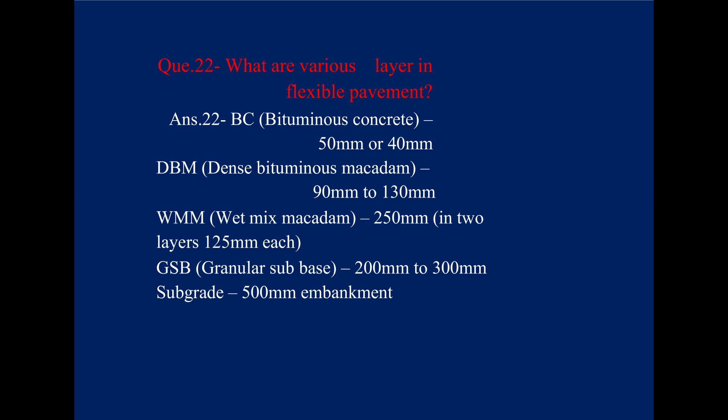Answer: BC, bituminous concrete, 50 mm or 40 mm. DBM, dense bituminous macadam, 90 mm to 130 mm. WMM, wet mix macadam, 250 mm in 2 layers of 125 mm each. GSB, granular subbase, 200 mm to 300 mm. Subgrade 500 mm embankment. Question: what is the method of design of flexible pavement?

Answer: flexible pavement is designed as per IRC 37. Design is based on traffic in MSA and CBR value of soil. Question: what is the method of designing rigid pavement? Answer: rigid pavements are designed as per IRC 58 as plain jointed rigid pavements for highways.

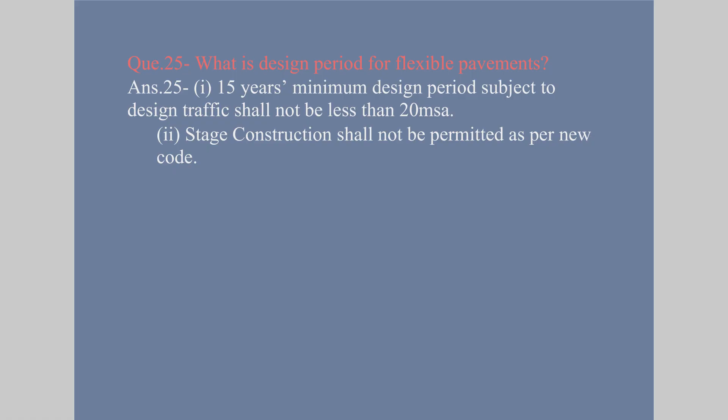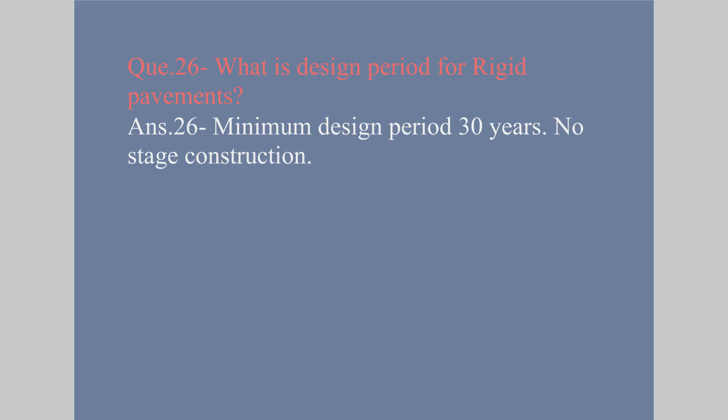Question: what is the design period for flexible pavements? Answer: 1. 15 years minimum design period, subject to design traffic not less than 20 MSA. 2. Stage construction shall not be permitted as per new code. Question: what is the design period for rigid pavements? Answer: minimum design period 30 years. No stage construction. Question: what is the permissible roughness value?

Answer: rigid pavement 2000 mm per kilometer for each lane. Flexible pavement 1800 mm per kilometer for each lane. Roughness is measured twice a year. Question: how do you determine the thickness of overlay? Answer: the thickness of bituminous overlay is determined on the basis of FWD, falling weight deflectometer, test as per IRC 115/2014. Minimum thickness is 50 mm BC, after attending the requirement of profile correction.

Question: what are EPC contracts? Answer: EPC stands for Engineering Procurement Construction. In these contracts, the payments are made by the authority as per work done by the contractor in accordance with schedules. Question: what do you understand, very briefly, by contracts on HAM mode?

Answer: HAM stands for Hybrid Annuity Mode. In these contracts, 40% payment is made to the concessionaire during construction in 5 installments of 8% each, based on progress stipulated. Balance 60% payment shall be made in 15 years in 30 installments, semi-annuities, as prescribed in CA. Concessionaire shall maintain the highway for 15 years of concession period.

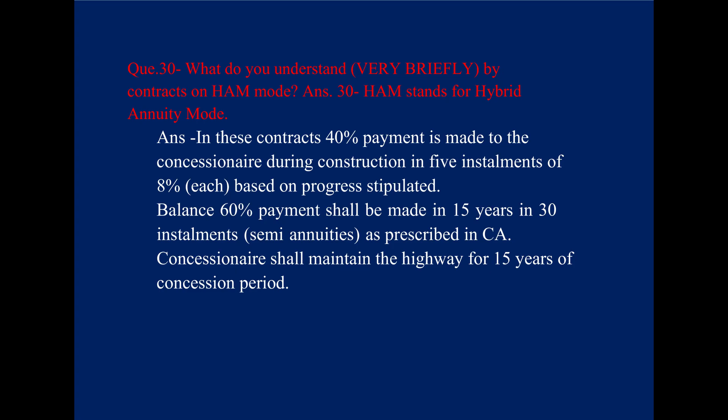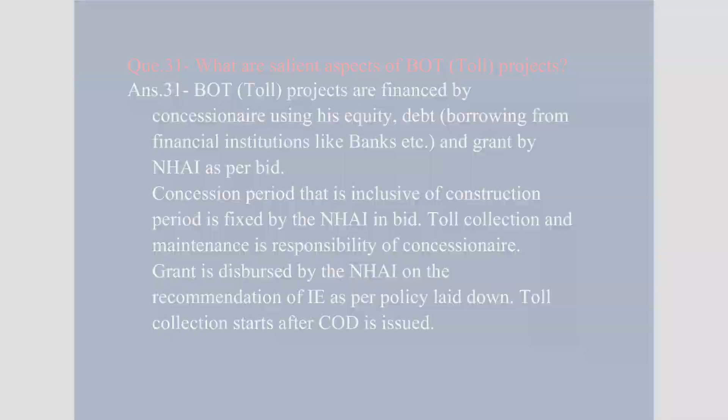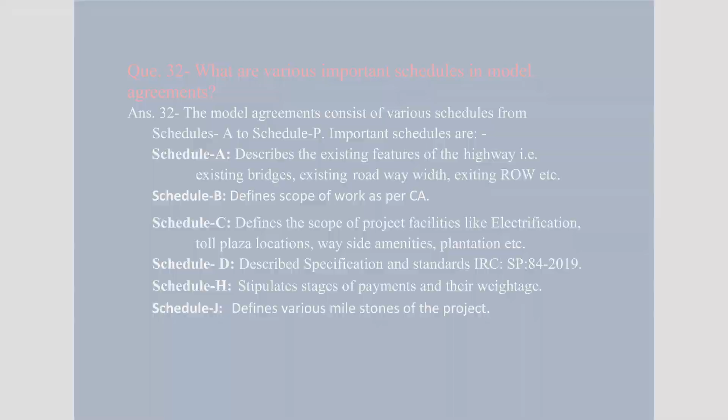Schedule D describes specifications and standards, IRC SP 84/2019. Schedule H stipulates stages of payments and their weightage. Schedule J defines various milestones of the project. Question: what are the various tests to be performed on soil to ascertain its suitability for road construction?

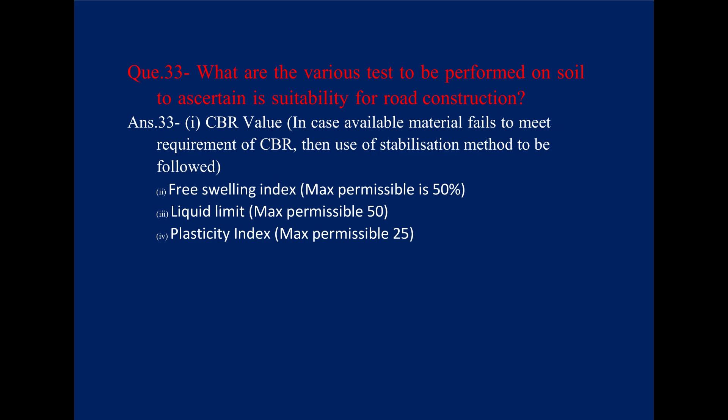Answer: 1. CBR value; in case available material fails to meet the requirement of CBR, then a stabilization method is to be followed. 2. Free swelling index, max permissible 50%. 3. Liquid limit, max permissible 50. 4. Plasticity index, max permissible 25. Question: what are the various things to check to ascertain the suitability of sand for road construction?

Answer: 1. Sand should be free from mica contents, otherwise it shall affect durability of concrete. 2. It should be free from dirt and silt, otherwise it should be washed and drained for at least 72 hours before use. Question: what are the various tests to be performed on aggregate to ascertain its suitability for road construction?

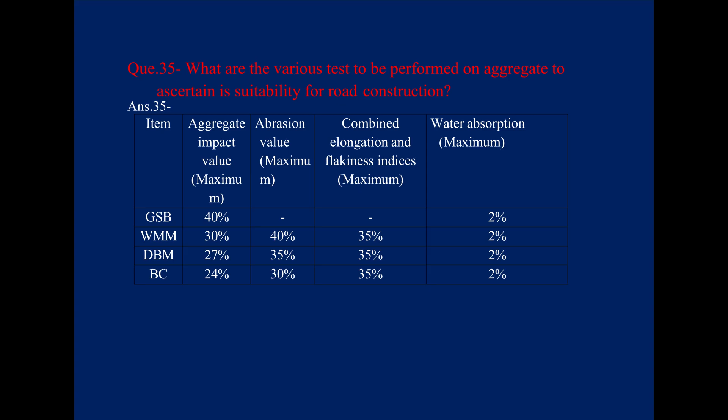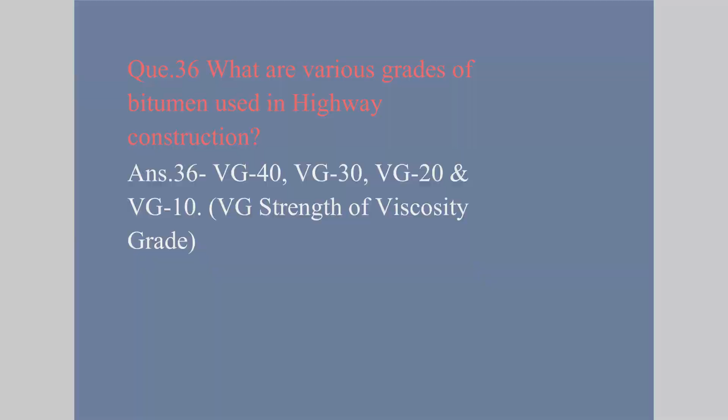Question: what are various grades of bitumen used in highway construction? Answer: VG40, VG30, VG20, VG10, VG stands for viscosity grade. Question: how will you work out change of scope cost for reduction in scope of the project? Answer: clause 16.6.1 of CA.

The following process shall be followed for calculation of total cost of reduced scope. 1. NHAI shall work out the civil cost of reduced scope as per SOR applicable on bid due date. 2. The civil cost of reduced scope shall be multiplied by 1.15 to arrive at estimated cost of reduced scope. 3. The estimated cost of reduced scope then shall be multiplied by the ratio of bid project cost to estimated project cost to arrive at the total cost of reduced scope.

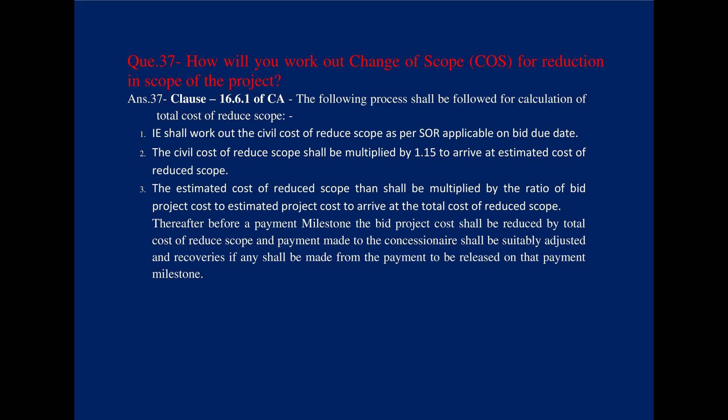Thereafter, before a payment milestone, the bid project cost shall be reduced by total cost of reduced scope, and payment made to the concessionaire shall be suitably adjusted, and recoveries, if any, shall be made from the payment to be released on that payment milestone.

Question: how will you work out cost due to additional work ordered on the concessionaire? Answer: cost of additional work shall be worked out as per prevailing SOR of that state. Items not covered in SOR shall be assessed based on market rate supported with minimum 3 quotations. 20% advance payment can be made on change of scope order.

Question: what is the effect of change of scope on O&M cost? Answer: O&M payments as provided in clause 23.7 shall be reduced or increased in proportion to the reduction or increase in the length of the project highway.